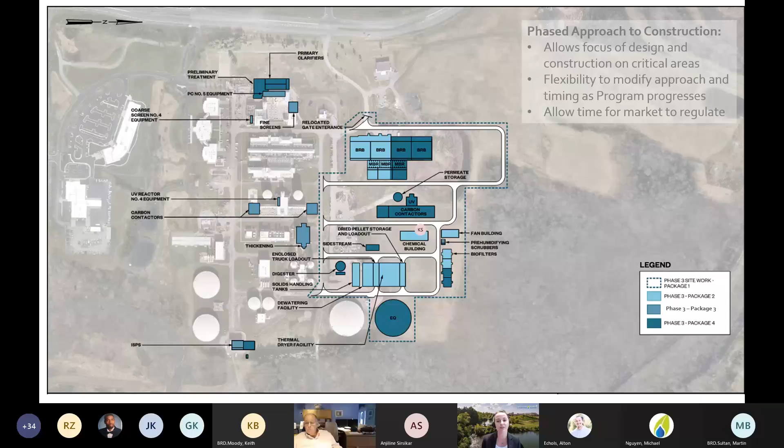But again, this is a 15-year program. So in the next couple of years, we're really going to be focusing on those first two phases. And so this is what that first site preparation package really looks like by itself. We're giving our anticipated timing of completing that.

It's a very large area that we're talking about working in on the site prep. We do have a large stockpile that has existed from the very beginning of Broad Run that will need some relocation, and we're on really high bedrock, so there will be some rock removal required in this.

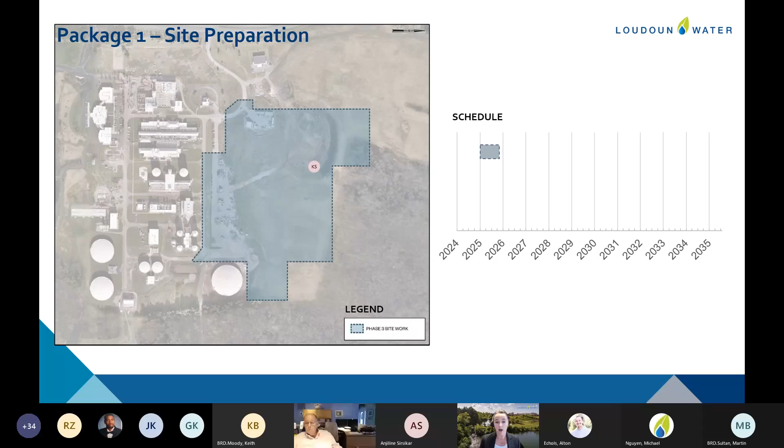And then the second package that we'll be working on is this more time critical solids system expansion. It's really involving the more biological side of the process. These systems need expanding early because, as we've mentioned, we're having more concentrated wastewater, so that's creating a larger load specifically on these two treatment trains. So this expansion allows us to really take a good leap, get ahead.

But what's important to know is on this solids facility, we're taking that all the way to 30. So when we finish that expansion, the new dryer facility will be completely out. This is a much bigger package, so you'll see the longer time period reflected here. And this schedule is really laid out based on, at this point, as soon as we think we can get there, and as soon as we're ready, we want to proceed with these.

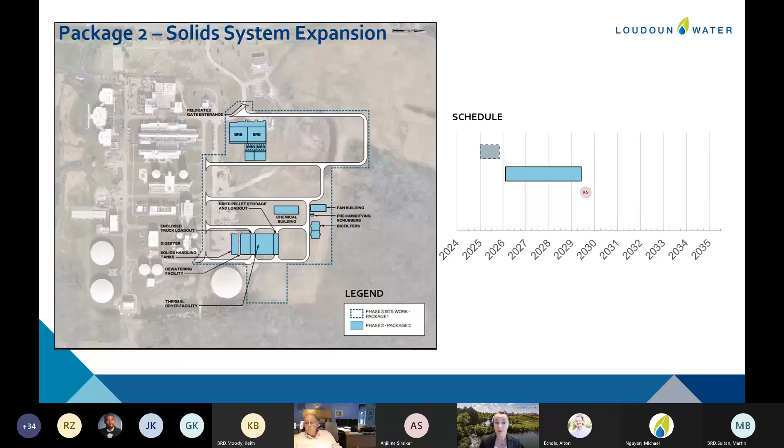So I want to show now what the overall program schedule looks like. The first two design contracts that we talked about are spread out really through the end of 2029, and we're starting to indicate how their construction costs break out. In the last presentation, we mentioned a whole overall project cost of $650 million. Well, 540 of that was in construction. The remaining was the design and engineering services.

So we've got some package costs broken out here to talk about today and talk about timing. When we look at these, though, every time we come back, we'll be able to give you additional updates on this overall schedule because, again, the phasing gives us some flexibility. If market conditions look good, we can take package 3 and move it up. If we're seeing increases, we can move package 3 or package 4 out. We're really liking the amount of flexibility we're getting.

So first step here today, though, is to get the design services started on this. The previous contract that was awarded was for planning of this, so this will be the first really step at design. And I did want to just reiterate, so when we brought forward initially the selection of Hazen and Sawyer, that was a qualification-based selection of their services for the overall phase 3 expansion. So each of these design tasks and construction services tasks will all be amended onto that main contract that they were awarded.

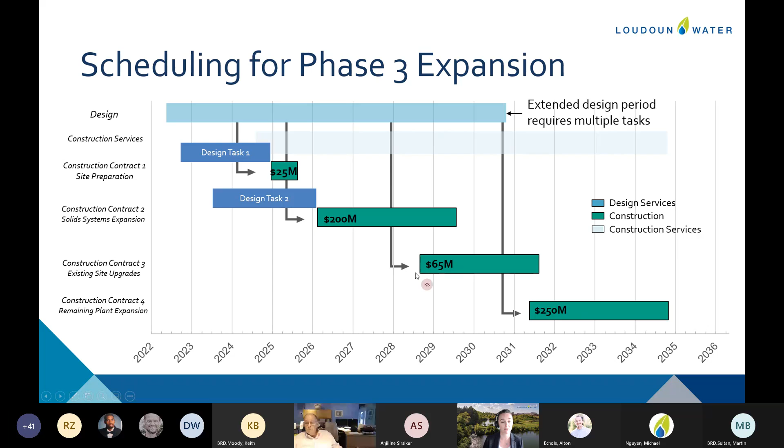So the basis of design report, this task item, is a very substantial report. It's going to cover 14 different process areas and 8 different disciplines. It's a large undertaking in and of itself, but it's the critical starting point so that we know moving forward how the rest of the facilities will be constructed.

The design of construction package number 1 includes development of plans, specifications, and bid phase services for site preparation work. We want to get at that as soon as we can, so we will wait until the design basis has confirmed our overall footprint and we've completed our survey and geotechnical work, and then we'll be able to prepare those documents and get started with construction.

The next task included in this initial scope is some equipment pre-procurement. This is a similar approach to what we did on the phase 2 expansion, where we have to go to the membrane manufacturer and pre-negotiate a price so that we can get shop drawings developed. Some systems are so large and custom designed for the site that we can't complete the design of the facilities without knowing the details of the system going in.

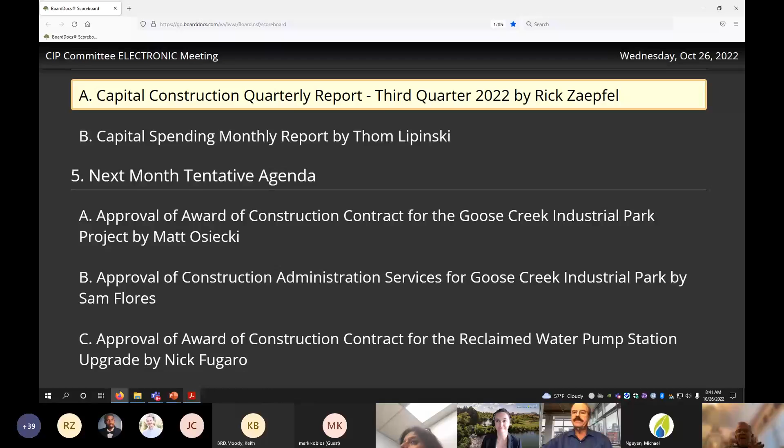Okay, the next item is the Capital Construction Quarterly Report.

Okay, good morning, can you hear me okay? Yep, yes, good. Okay, so I'm going to talk through the third quarter capital construction report. Go ahead and double click again, Rick. Oh okay, there we go. If you want to go back one.

So my agenda here for today is to provide a brief snapshot of the 3 smaller active projects that are in construction: the Selma booster pump upgrades, Howardsville improvements project, and the Trap Rock flow meter and sample line project. Then I'll go into a little bit more detail on the Broad Run expansion to 15 MGD, that's the phase 2 expansion. And then I'll provide my quarterly numbers here at the end of the presentation.

So the Selma booster pump upgrades project: the purpose of that project is to replace an existing manually operated booster pump with 2 smaller pumps and VFDs to cover the low flow condition for the communities that this treatment plant serves. We awarded this contract a little bit earlier this year. It's a small contract, $373,000, and it really has yet to get started. We've just paid for bonds and insurance, and the contractor is waiting for the materials and equipment to arrive before they mobilize and start construction in earnest.

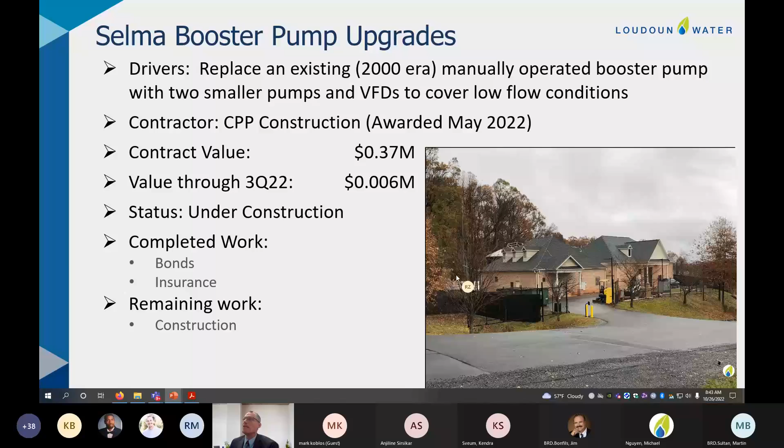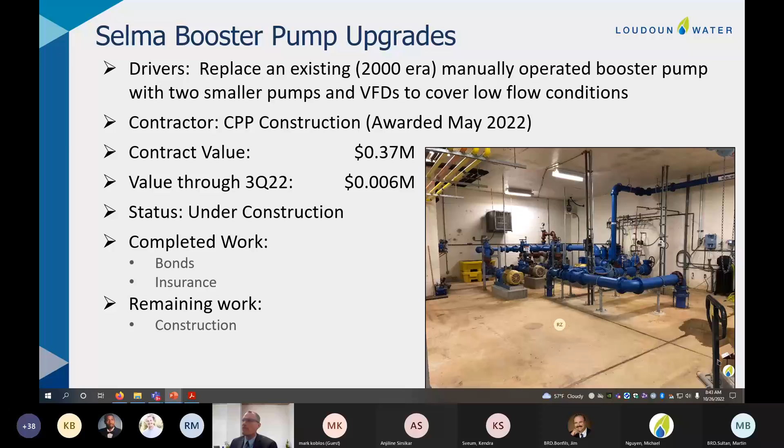So we're still in that mode of construction here. In my pictures, I've got an exterior view of the treatment facility, and then looking inside, the booster pump I'm highlighting is the original 2000-era pump that was left in place during the 2016 project. That will be removed and replaced with two smaller jockey pumps to cover the low flow condition.

So really the message here is construction has yet to start in earnest as we wait for the arrival of materials and equipment for this project. As you know, some of the materials and equipment take a while to be fabricated and delivered to these various projects due to the global supply chain and other issues.

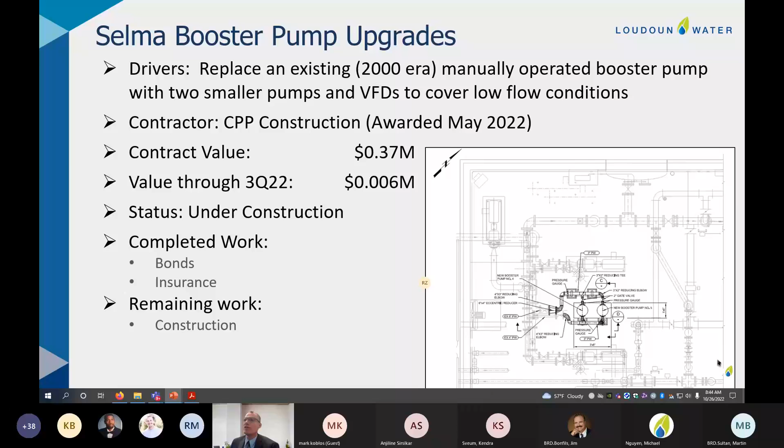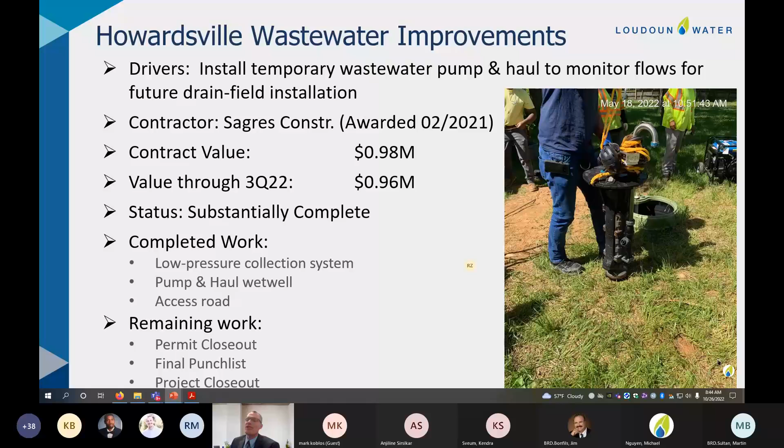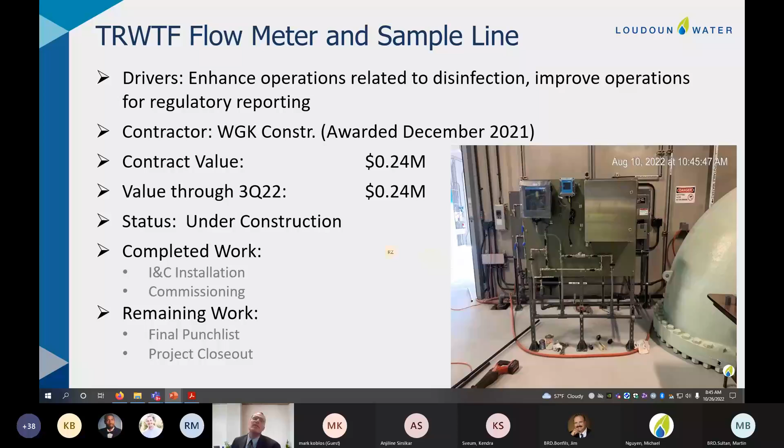This one was awarded in December of last year. The contractor has nearly reached substantial completion for this one. We're very close to that milestone, and they've recently completed the finesse work, as I call it—the instrumentation and control pieces of construction and commissioning. Once they hit substantial completion, the remaining work will really be punch list and closeout. So we're very close on this project as well.

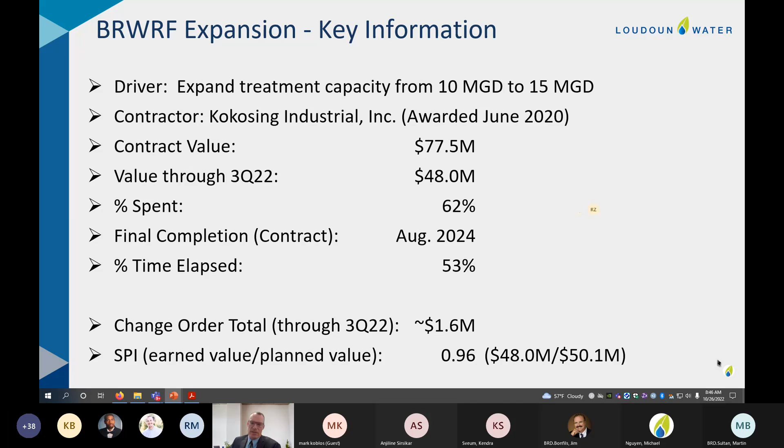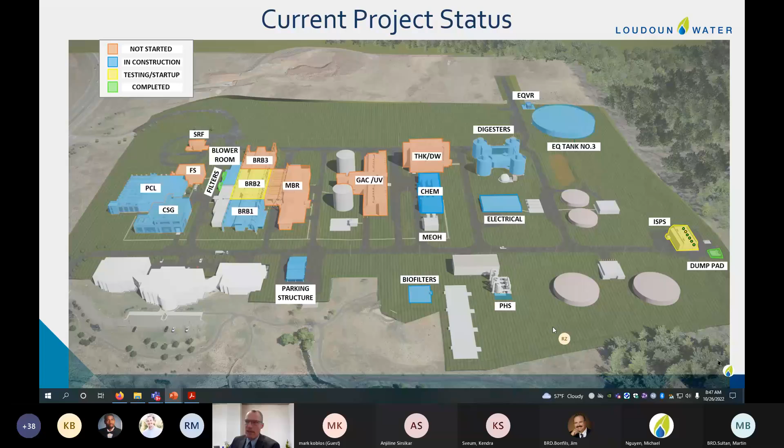Mr. Koblos has a question. Yes, sir. Hey Rick, if you could just go back to that last slide.

Certainly. I just wanted to say this is a fantastic slide and very easily shows me what's going on. So whoever came up with this, it's just perfect. I look forward to the slide in each of your presentations. Okay, sure thing. Thank you. Okay.

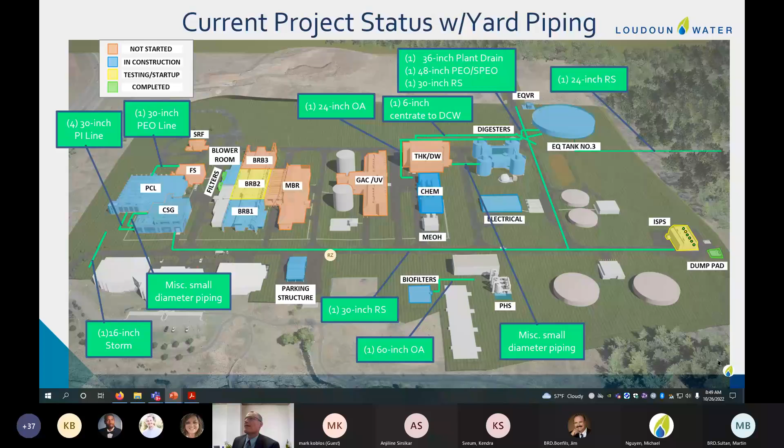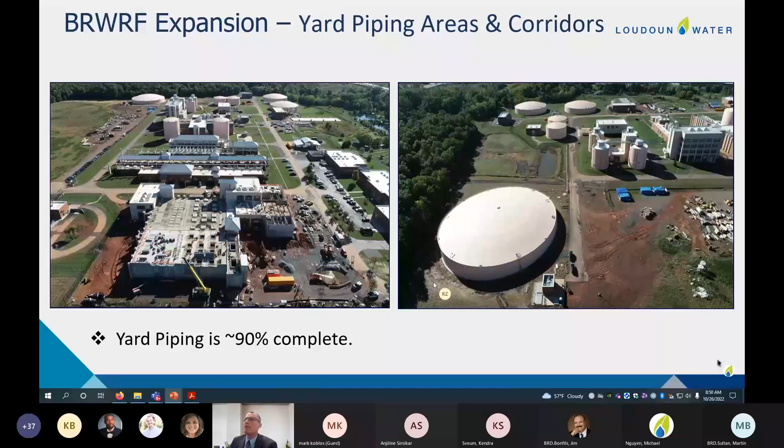There are several new large diameter pipes in this travelway supporting the new equalization tank and the vault right here, as well as a couple of large diameter pipes off to the east and west. Just to provide perspective, we're 90% complete with the yard piping, so we're really up out of the ground to a large degree on the project through the third quarter.

Moving on here, I'm going to call out a couple of specific work areas and talk about the progress through the third quarter. One of those is the odor control improvements.

During the third quarter at the odor control facility, which encompasses all of these areas, we set the new pre-humidification scrubber and did much of the underground piping work that would connect the scrubber to the new biofilter. We also completed the concrete for the biofilter.

There are 4 existing biofilters right here, and in the project we are building a 5th biofilter. We're at the point now where we're coating the concrete and then moving forward with getting the media installed and getting the biofilter covered up like these other 4.

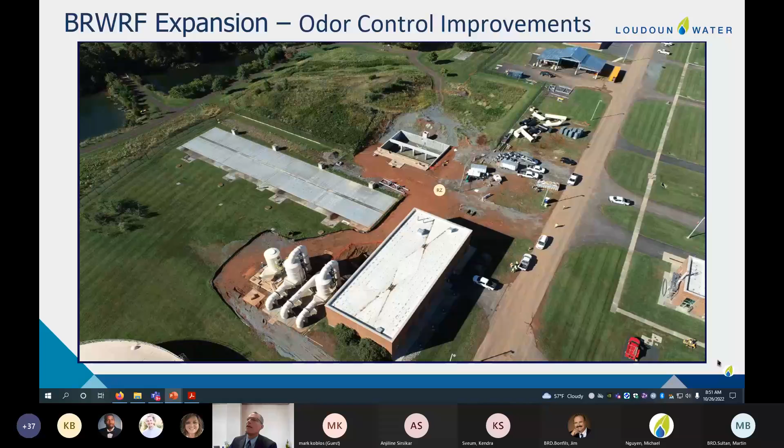So moving along well here at the odor control improvements. Another area I want to bring to your attention is the chemical building. There's a lot of work at the chemical facility, some of which is coating work.

On this picture on the right, we've got a chemical containment area, which would contain a spill if it were to happen. This has all been coated with a chemical resistant material, and that work has been completed.

Also, some of the other work at the chemical facility: various pumps, piping and accessories have been installed. Over here on the left, you see the crane setting in one of the new chemical tanks. We've installed 2 of the new chemical tanks at the chemical facility, so progressing in this area as well.

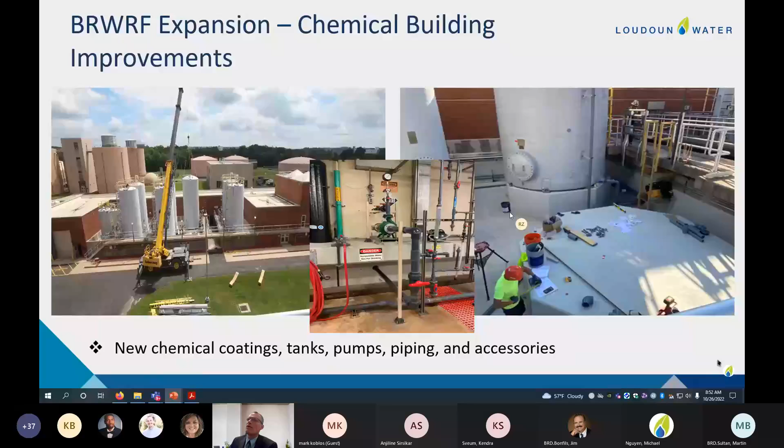Then we're going to jump over to the generator building, which involves the installation of the 4th generator. We've got an up top view of the generator in the picture on your left, lower left-hand corner, and you can also see the generator here in the picture on your right, the first generator you see. So the work in the generator building is more focused now on power and control conduits.

The contractor has generally finished up the big air moving equipment installation. In the center here, we've got the intake grill and fans, which pull air into the building when the engine is running, because the engine is pushing air through the radiator and out of the building. These fans provide a balance of air in the building when one of the generators is running.

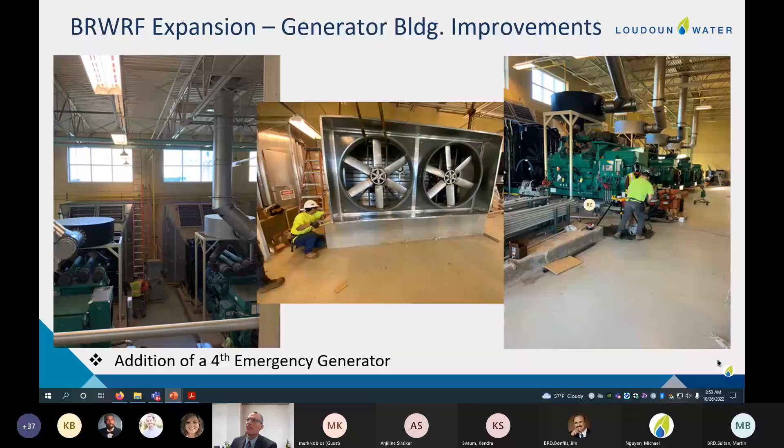Much of the heavy work is winding down here at the generator building, and we're into more of the power and control, or what I like to call the finesse work with the construction. The last area I'm going to feature is the screen and grit and primary clarifier area, and progressively we're going to step through that.

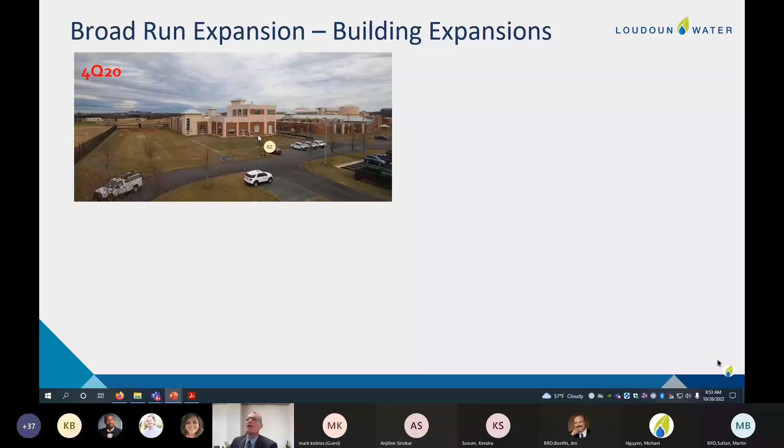Here's a pre-construction view of the screen and grit building and the primary clarifiers. As we step through the construction progress, we'll jump ahead to the fourth quarter of 2021, where we start to see progress there with structural work.

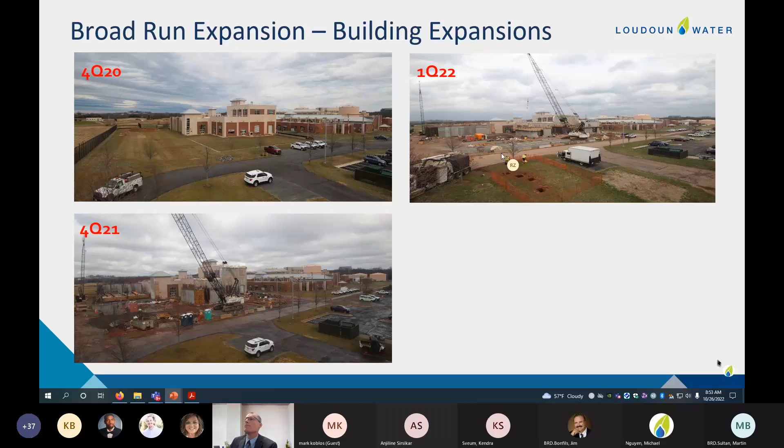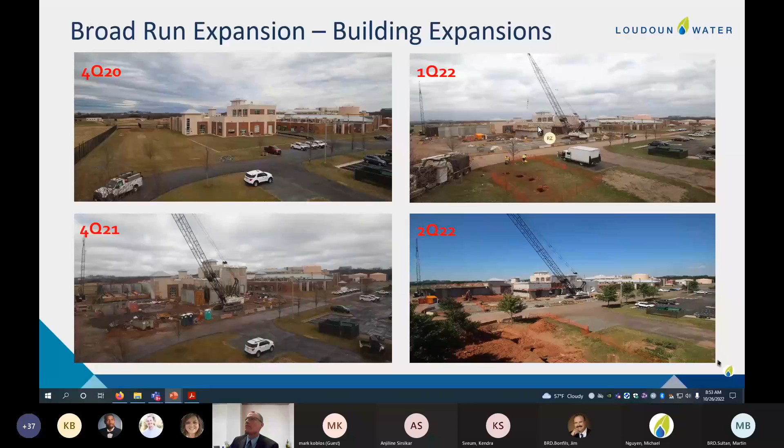It continues through the first quarter of 2022 and also the second quarter as well. You can see the structural concrete work progressing as well.

I've got a really nice aerial here for you to look at through the third quarter of the screen and grit and primary clarifier. So here is the screen and grit expansion right here. Through the third quarter, the contractor continues to pour concrete, basically still working on slab concrete placements and wall concrete placements.

Over to the primary clarifier expansion, you can see the transition in color of the new versus the existing primary clarifiers. So here at the primary clarifiers, we've completed all concrete work in the third quarter, and we have tested the clarifier tanks, and they've passed their hydrostatic test.

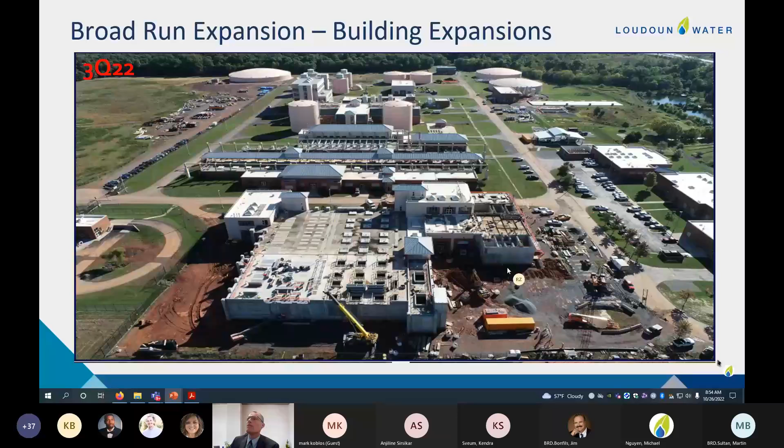So we have moved on in the clarifier building to some of the process piping work, and of course we'll also get into some of the mechanical work very soon in this building as well. Here's kind of a progressive picture of a 30-inch diameter pipe, which will feed one of the new clarifiers being installed.

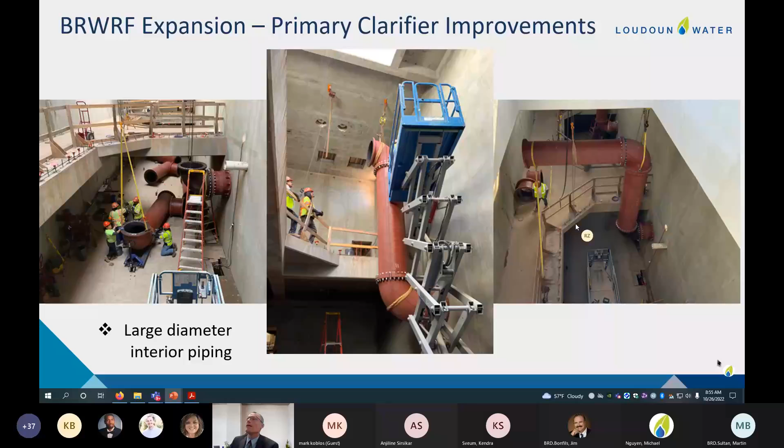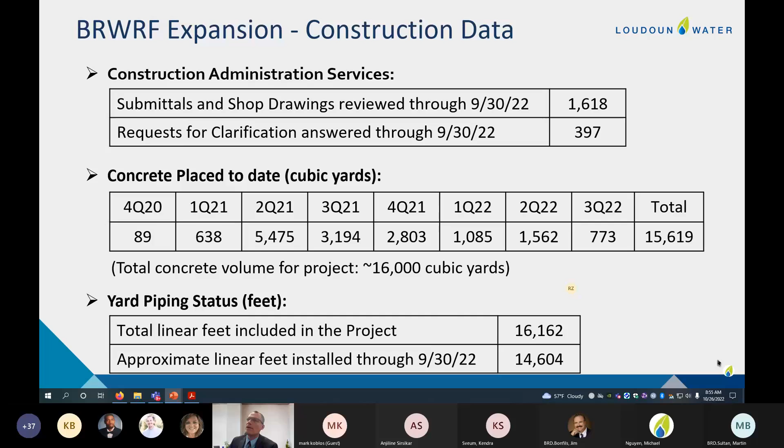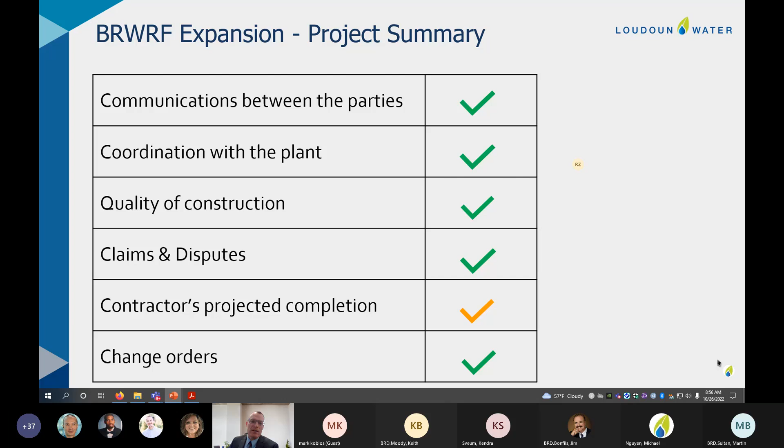Okay, we'll move on here. So some summary information I want to share with you. One good thing I want to call out is that we have a very good working relationship with the contractor. We really work well with Kokosing Industrial, and it helps to have a good relationship with the contractor, which we have. And so we continue to maintain that through the various communication devices in the contract, our shop drawings and RFIs and other notices.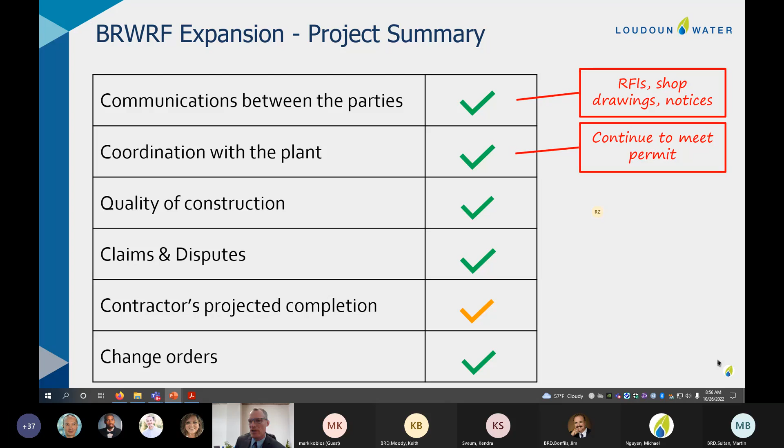That is going well. We also continue to meet permits. So the disruptions and interruptions caused by this project, because it is a retrofit project with a lot of connection points, tie-ins, shutdowns, and the like, that continues to go well, and we continue to maintain permit compliance with the plant.

As with all construction projects, there are quality issues, but we continue to track and get those addressed by the contractor promptly. At the moment here, we do not have any outstanding unresolved claims or disputes on the table, so that's very positive.

Going over to the contract time, we are nearly on time with the project. For the first time in the third quarter, the contractor's schedule update started to show a little bit of a late finish for substantial completion. The schedule update through September shows us at minus 18 days, or 18 days late on completion. My next slide will speak to that as well.

And then on change orders, we've got 9 executed. I mentioned the total change order amount is about 1.6 million through these 9 change orders. We did have our 10th change order executed here early in the fourth quarter. It didn't quite make it in the third quarter, but roughly we're executing about 1 change order per quarter, more or less. We continue to be on that pace.

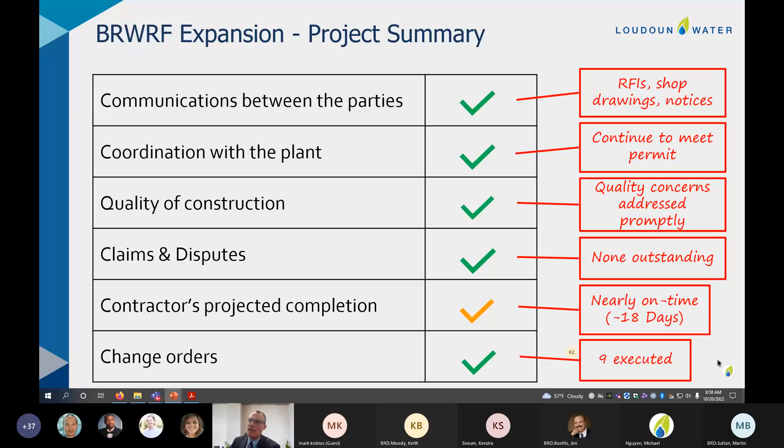Okay, I'm going to shift here next to talk about risk. And I have one question.

On the communication between parties, do you use a formal partnering process, or you just do it well? We have not, we've just done it well, Mr. Sultan. I realize the importance of maintaining a good relationship with the contractor, and I've just done what I can to do that, utilizing meetings and written communication items as well, and other things. So we've not had any formal partnering, in that sense, or in the sense of Trap Rock, which I think there was formal partnering, but we have not utilized that. Well, it sounds like you're doing it okay.

Okay, thank you. Yes. Okay, so again, as shared in the past, supply chain or global supply chain delays do present the greatest risk to the project. And to date, we've seen those impacting ductile iron pipe and fittings, instrumentation components, and then also some stainless steel as well.

With the mitigation strategies we've used to try to keep these to a minimum, on our end we've encouraged the contractor to submit their submittals in a timely manner and release them for fabrication once they reach an approved state. We continue to encourage the contractor to be timely with those, and on our end we've strived to meet or exceed the contract requirements for submittal review times.

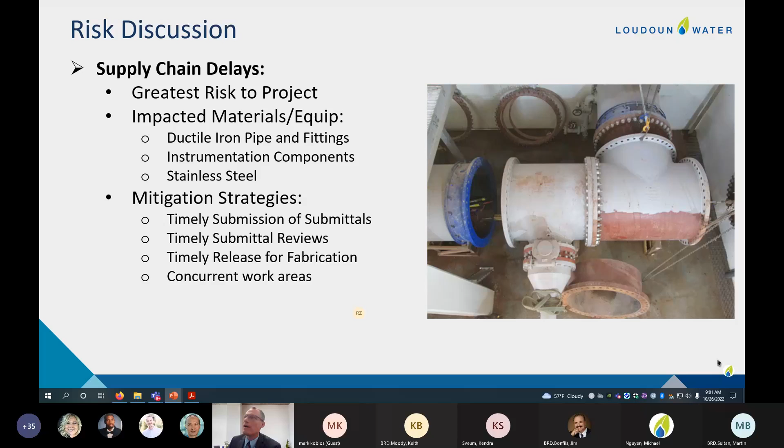That brings me to my summary project list. On the top are the 4 active projects in construction, with their stats. In the middle is the 1 completed project from the 3rd quarter, the Courtland project, so this will be your last view of it before it drops off my tables next quarter. And our 2 up-and-coming projects at the bottom are the Paragon Park and the Beaverdam Reservoir project, which will just be getting started this month.

So does anyone have questions about this data or any of the other slides that I presented?

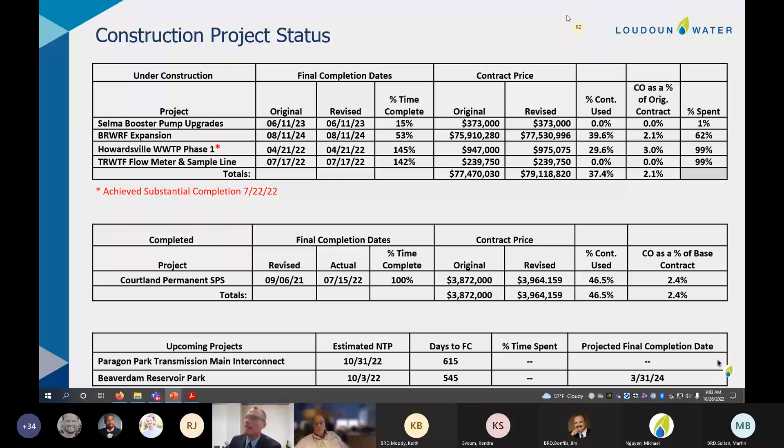Okay, let's move on to the next item. Very good report, very good. Okay, thank you. I can tell you when I had construction at Fairfax, we didn't do that well.

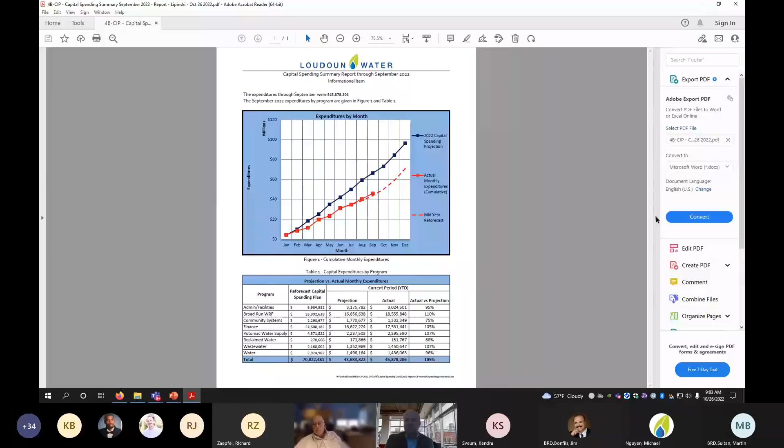Okay, the next item. Mr. Koblos has a question. Yeah, this question is actually for Thom.

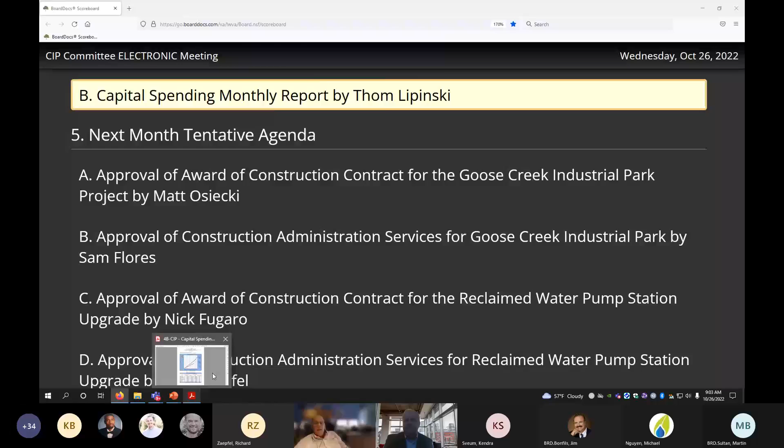When are we getting the CIP sheets? We'll have them to you as we're still wrapping up our preparation here, so we'll get them to you in advance of the next meeting, probably with a goal of next week.

Okay, aren't we looking at the costs tomorrow? No, middle of November. Oh, I thought Brian was presenting the budget for tomorrow. Brian's presenting the operating budget, I got it. Okay, then, yeah, got it. Yep, never mind.

Mr. Chairman, I'll just mention that as Rick was showing, there's been a lot of project activity throughout 2022. He was talking about the construction projects, but all of our projects continue to make progress. You can see the spending through September is tracking just slightly above what the mid-year reforecast was, which was done at the middle of the year.

So if there's any questions, I'd be happy to try to answer them.

I assume that the lag time is the result of procurement of equipment and things of that nature. A lot of it is associated with some of that, as well as just the pace of the projects in general.

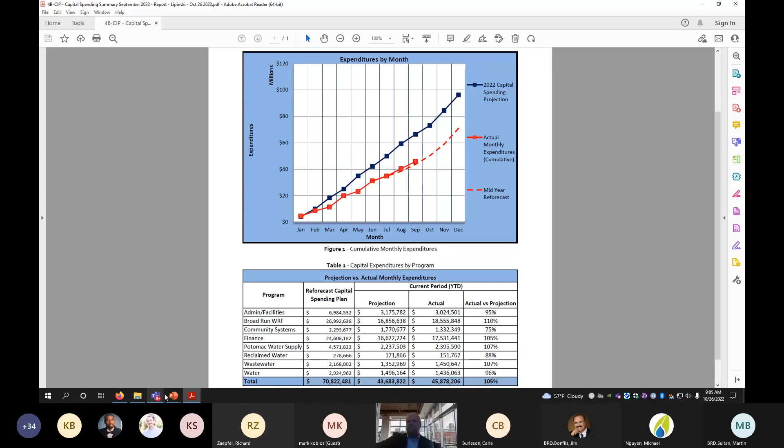So that would be to adjourn the meeting. Do I have a motion to adjourn? Yeah, this is Keith, I'll make a motion to adjourn. This is Jim Bonfils, second. Can we get a roll call?

Yes, Mr. Sultan, yes? Mr. Bonfils, yes. Mr. Moody, yes. Ms. Sursakar? Ms. Sursakar is absent for the vote, and the meeting is adjourned at 9:06 a.m.

Thank you, thank you everybody. Yeah, thanks everybody, great reports.